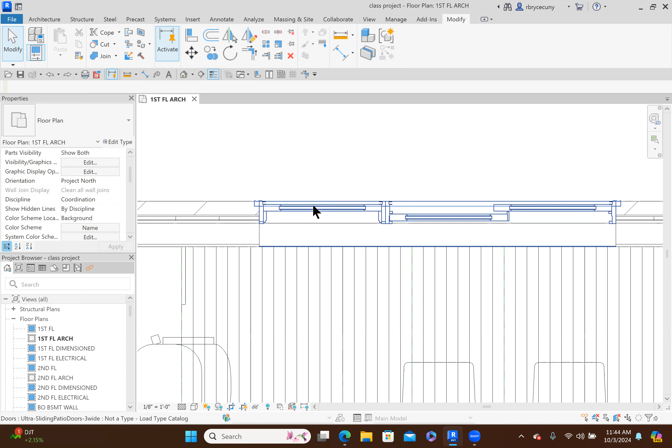So I spend time just looking at the plans and saying, what's working and what isn't, what's right, what's not right. I notice these door walls are more likely connected to the brick, which is just a veneer. There's no structural value to the brick. Basically, it has the ability to support its own weight, and that's about it.

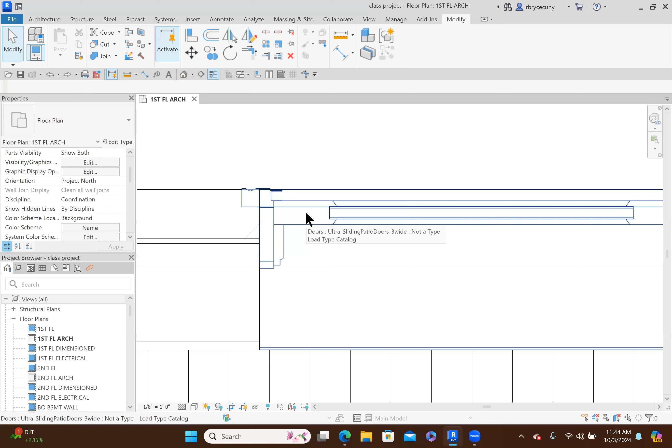So what that means is that this door wall needs to be recessed so that it's fastened to the stud wall. After the walls are put in, the door walls are put in, then the mason comes back and puts in the brick. It's a decorative finish, but it also is a weather-tight finish to keep the elements out of the house, but it's not a structural element.

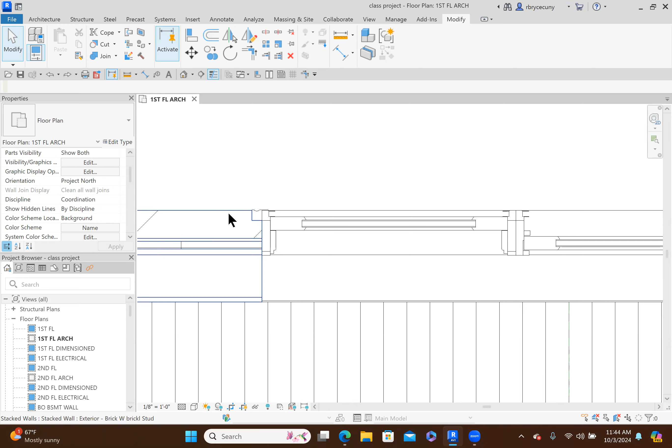So where this door wall is situated in the wall right now, it's as if it were fastened to the brick, which is not true. So let's take a look at the properties of this door wall, and you can see that the inset is set at 0, and the brick is 4 inches thick.

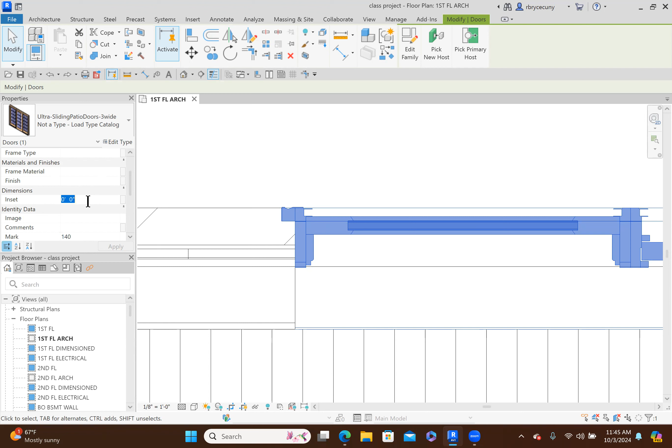So I'm going to change it to 4 inches, and you'll see what happens is that the door wall ends up coming back maybe a little bit too far. This is the brick mold, and that's what covers the transition from the brick to the door wall and the siding, or the stud wall. So that looks like it might be a little bit too much, 4 inches.

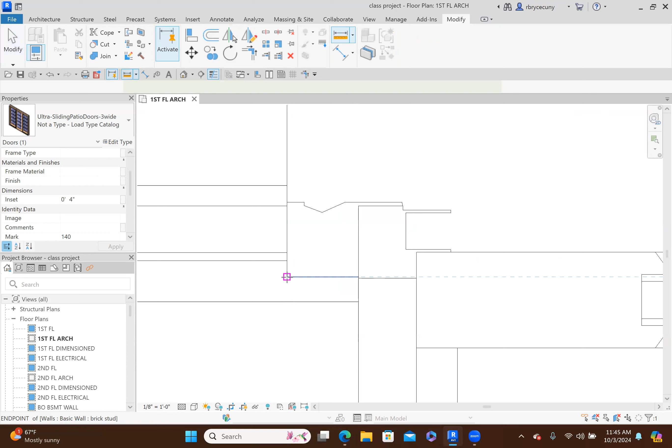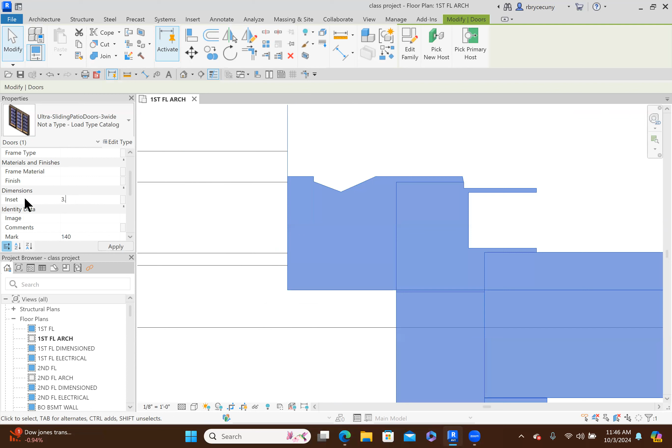Let's just change it to 3.5 inches and see what we have there. So this really should come back to here. I don't really want to do the math though.

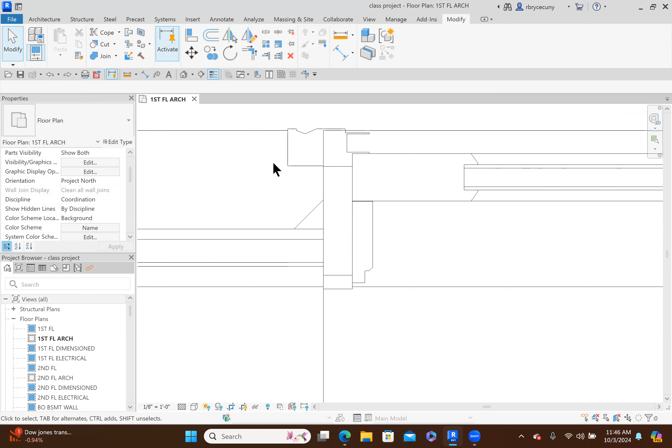1/16 of an inch. Now, so what I'm going to do is go back to the beginning. I'm just going to undo till it gets out there. And I want to move this back so that the back of this brick mold is touching the plywood sheathing.

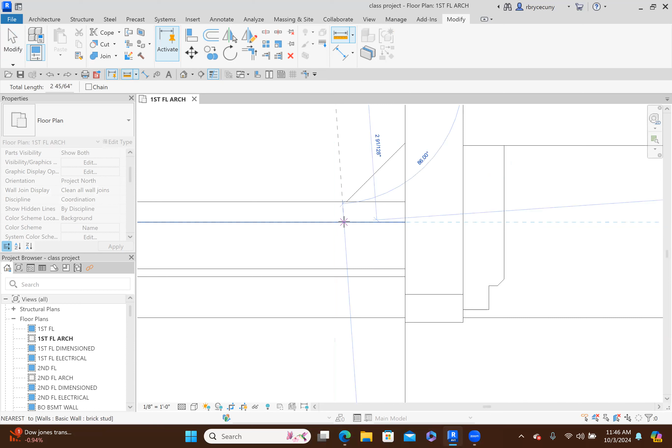So I can just measure that. I'm going to measure from here to the plywood sheathing, and you see it's a weird dimension, so I don't have to do any math. I will just copy that, Control C. That's the distance that I measured.

Then I'll click on the door wall and I'll say, that's the inset. Control V and paste it. And that gets it right where I want it to be. So it hides the edge of the brick, this brick mold, and it covers the wall itself too. So it's a finish, and that looks pretty good.

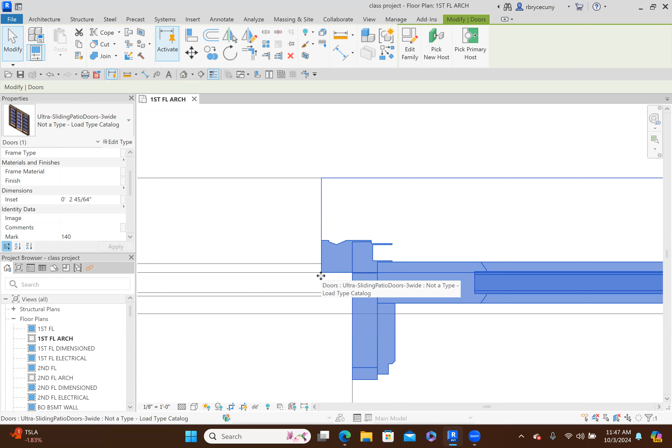Now, what I like about this particular door wall is that it actually cuts out the brick all the way to the face of the brick mold. A lot of windows just cut the wall perfectly straight here. So that's a good thing for whoever made this particular door wall, because that's actually how it's made. The brick and the edge of the wall don't line up. There's a step or an offset there.

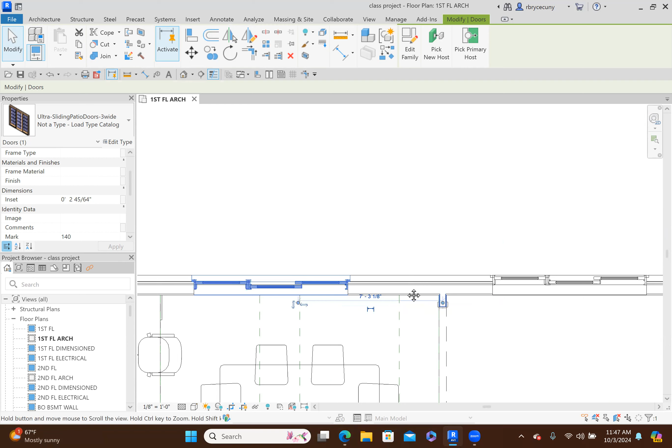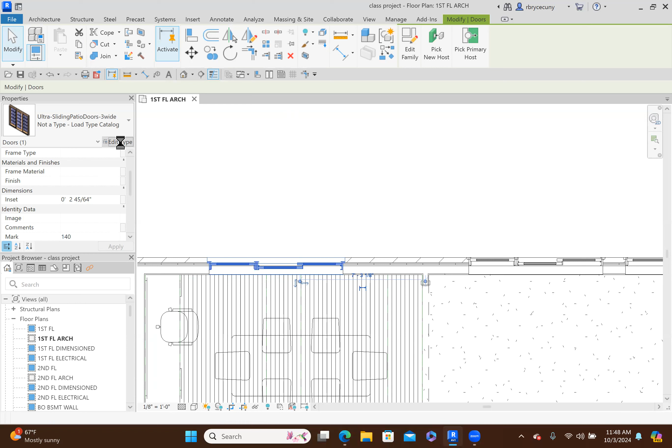So now it didn't change the other door walls, because when this was made, it was made as an instance instead of a... let's see, what's the word... type. So the difference is, if it were a type and I clicked on this, I would have been able to edit the type and tell it that the offset or inset for all of these were that distance we just determined, and it would have changed all of them.

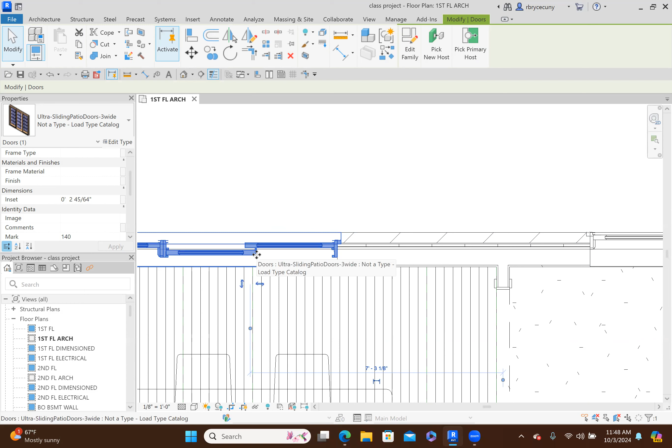But we did it for an instance, and again I prefer that, because sometimes this door wall might be mounted in a brick wall, and sometimes it might be mounted in a stud wall. So that's actually a better way to do it.

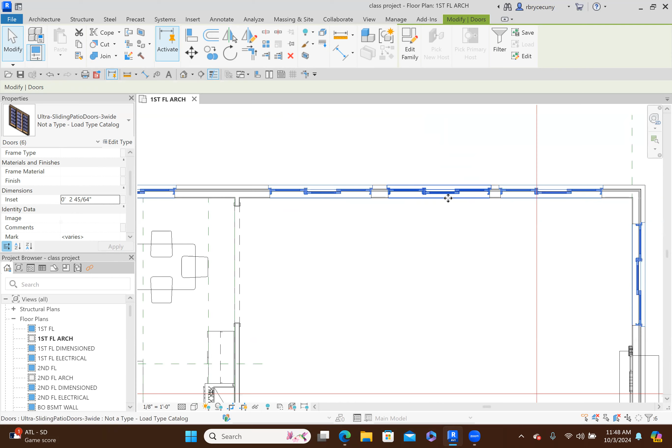So if we click on it, right click and say select all instances visible in view. Then we can change the inset of each one of those globally. And it did change them all, but whoever made this particular family really knows what they're doing.

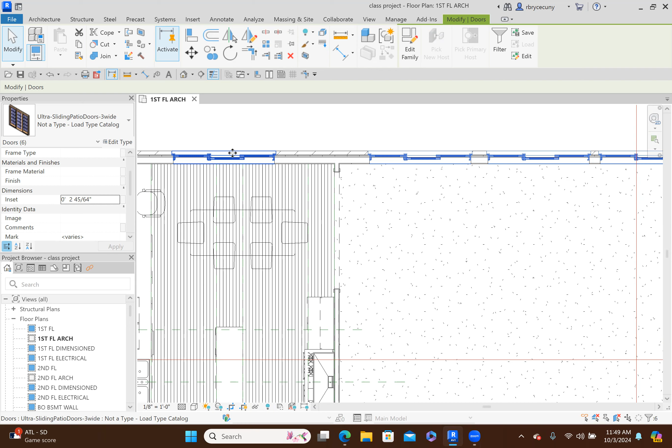That's one of the issues I find with Revit families from manufacturers: the manufacturer hires a programmer to write and create that family, but that programmer is neither an architect who uses the product or family, nor the actual installer who puts that product into a wall. So I like that whoever made these knows what they're doing in terms of how architects use it, but also how the actual construction occurs in the field.

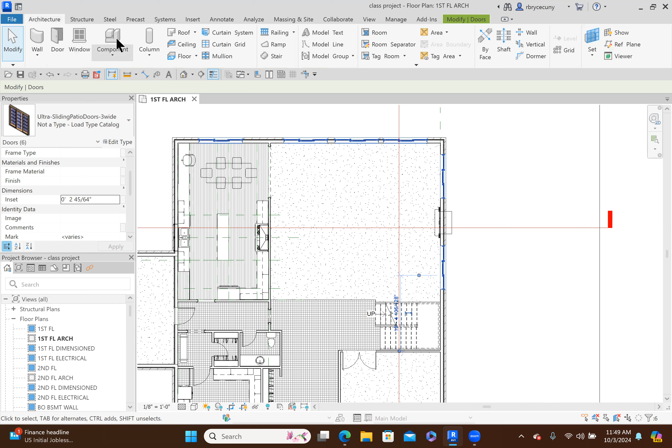So now we want to look at this and say, well, okay, what happens? I went to Revit City and got some more families. I picked a couple dining room chairs, downloaded them and loaded them into the project. And I got some dining room tables and loaded them into the project.

And I looked at them and I said, nah, that's not quite what I want. So let's search for table, let's see what comes up here. So I've got this parametric rectangular table, which was good. And what that means when it's parametric is that I can change the properties. I can make it longer or I can make it wider.

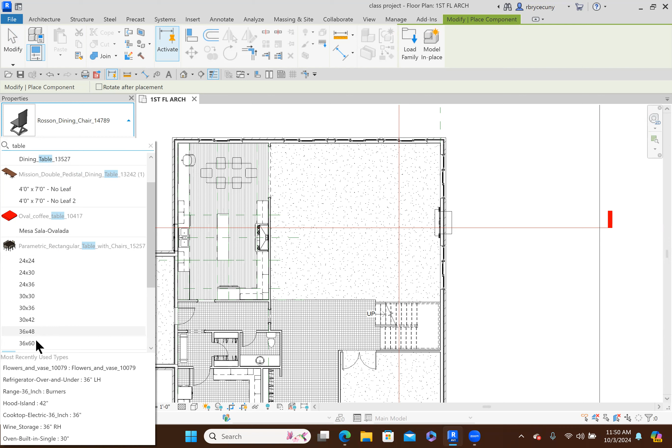So if we pick this one, there's a problem with that. I'm going to put that in and show you the problem - I can change the properties of that. So instead of being 5 foot, let's make it 12 feet and watch what happens. I made it 12 feet, but it didn't add any more chairs.

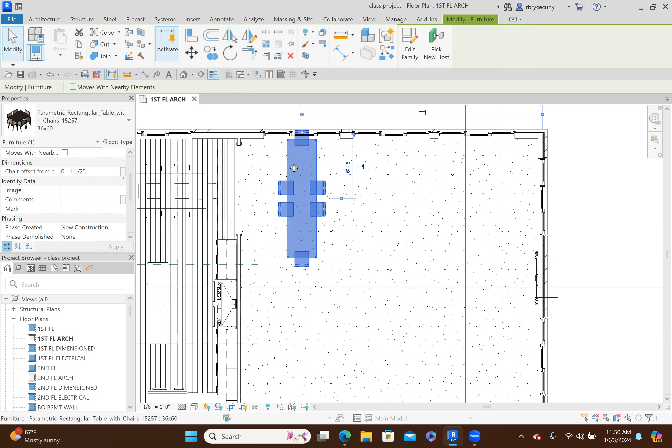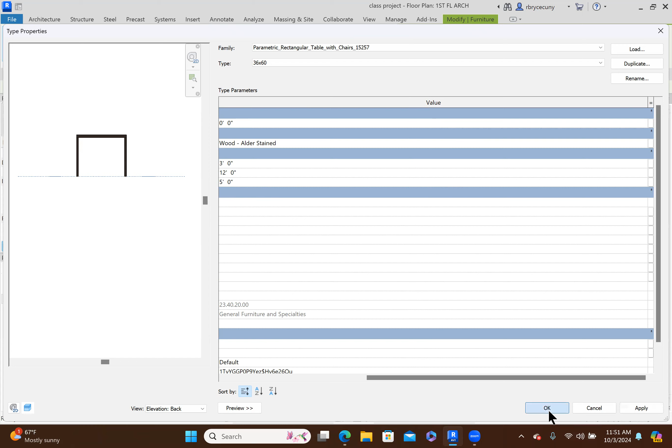So this would have been... the person who made this made the table parametric, but they didn't make the chairs array to expand for the table. So we're not going to use that one.

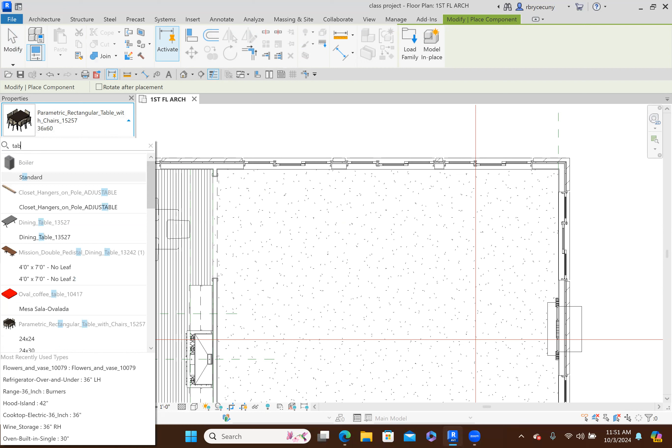Component - well, I picked a couple other tables, because I have a lot of space here and I want a wide table. So let's do that search again, TABLE for our search criteria.

I don't know, let's see, I don't remember which one was better. Yeah, that's good, see, that's a big table. And then we can put our own chairs in. So that table's all right.

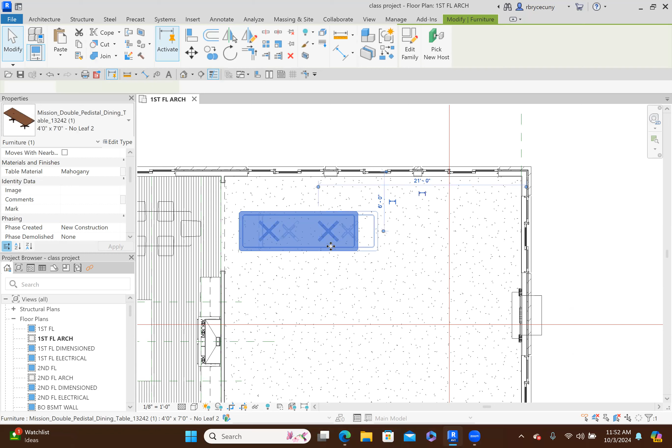And I'm going to put it that way because I decided that it's an odd shaped room, really. I'm going to make a little seating area around here with the big screen TV, and then another seating area around the fireplace. So that's a little bit of a weird layout, but I think it'll work.

So let's put some chairs in. Architecture, component - now we're going to click on that and type chair. Let's see what kind of chairs we have. Certainly don't want an executive chair.

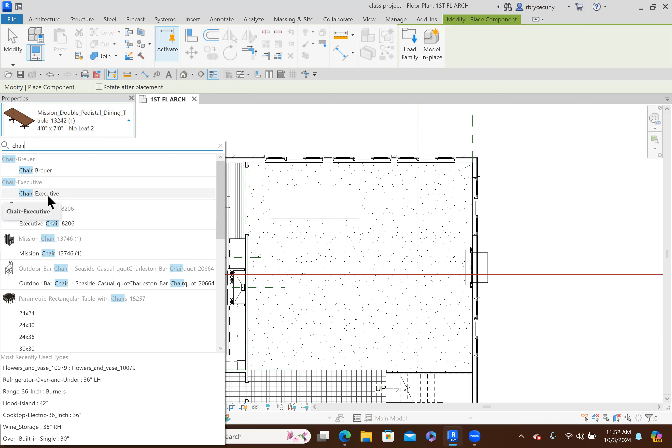That restaurant chair was kind of nice, but I tried it out and I didn't like it enough. But let's see, we'll use these chairs. So I'm going to put one in. I don't know what's the front, what's the back - I think this might be the back, but I don't know for sure.

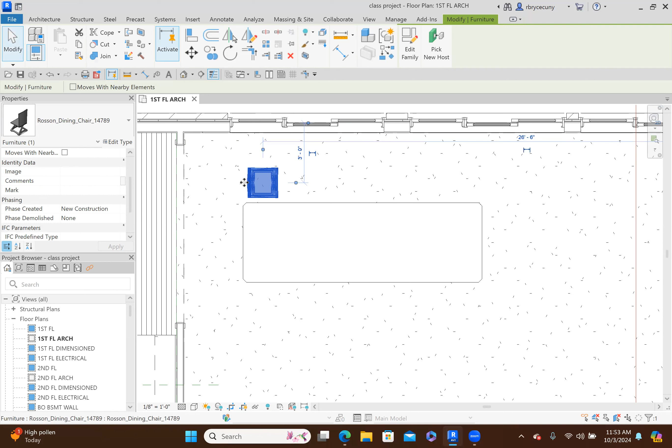So let's look at it in 3D just to see what we have. Yeah, so I need to rotate that chair. So let's click on it and hit the space bar. That's the orientation that we want.

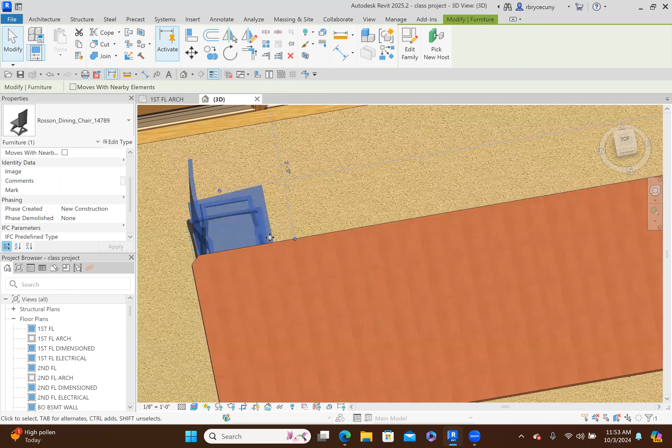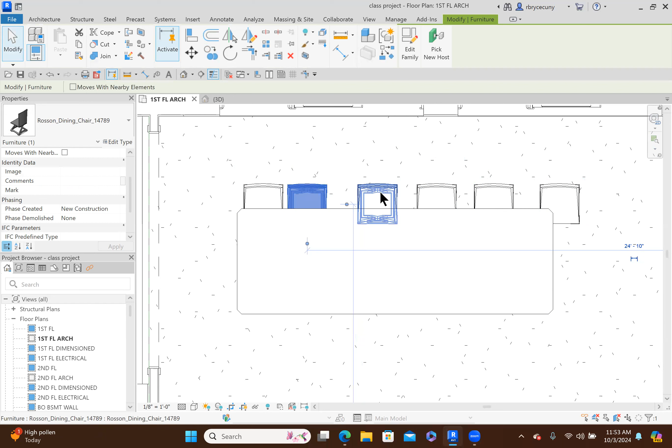Back to the first floor. I'm using the arrow keys on the keyboard, and we'll just copy these down from here to here to there to there to there. Maybe one more, and a little closer. Again, I'm just nudging them down with the arrow keys, trying to make some space for that last chair.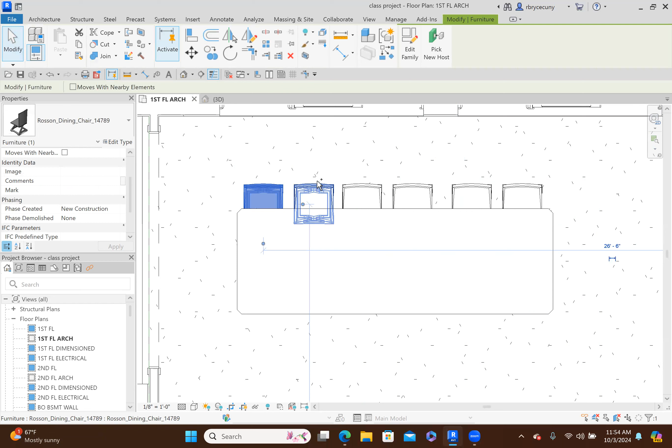Arrow, using the arrow keys. Now I'm going to use the mirror command, so I'll select each one of these and mirror about an axis. It's going to pick that axis and mirror those chairs about it.

So now I have my dining room table and chairs in there. 1, 2, 3, 4, 5, 6. So that seats 12 people. That's a lot. If you're celebrating a holiday and have a lot of people, we could really sit everybody there like that.

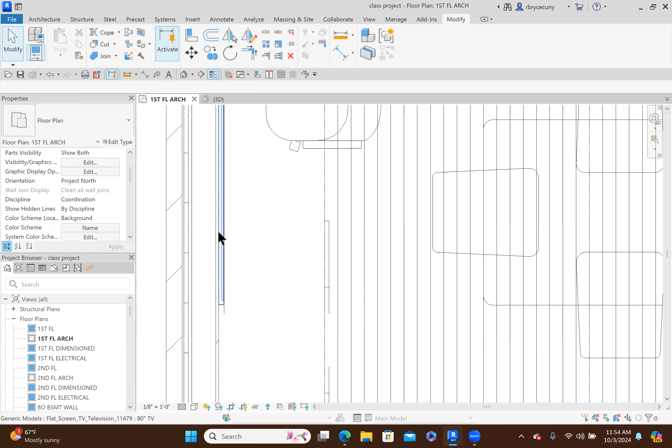Now let's put some, I think we put that TV over there. Let's pick that TV, say create similar, and grab and make it, and put it over here.

Okay, now let's look at the properties of that television. It's 80 inches. Cancel out of that. I want to see what other sizes we have. That's the biggest one that they have.

But if we edit the type, maybe we can make it wider. So let's duplicate it, and we're going to make it a 100-inch TV. So that means that this width would be 100 inches.

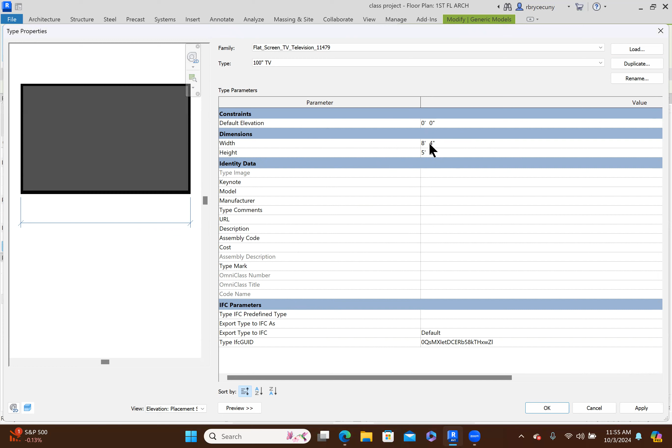And it changed the height of it as well. So there's a relationship between that, so that apparently whoever made this family said there's a relationship between the height and the width. So that's good, all right.

So now I have that big screen on there. It should really be centered on that wall. Let's take this section and we'll drag it over here and flip it and take a look at it. Did I flip it? I didn't flip it.

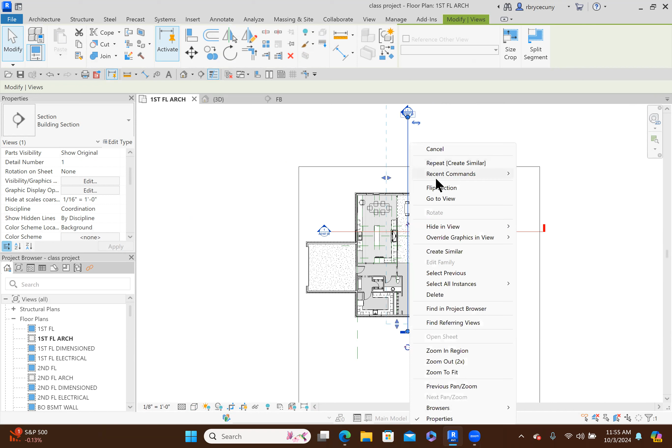Flip the section, then go to the view. Now we can see that TV. Of course it's too low, so let's raise it up so that the top of the TV lines up with the top of the door. And then I guess we could center it on that wall, although that wall extends beyond. Maybe we should center it from here.

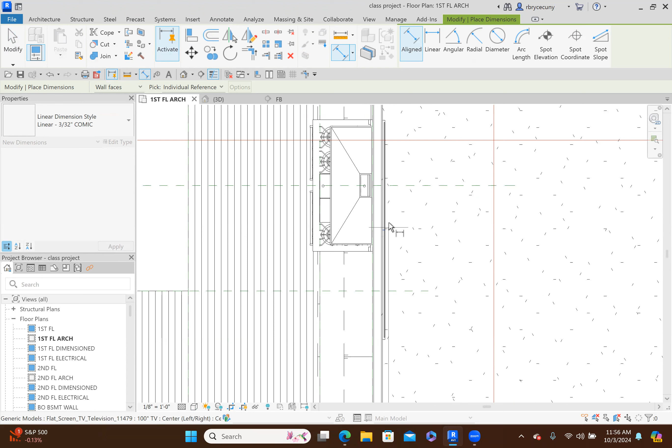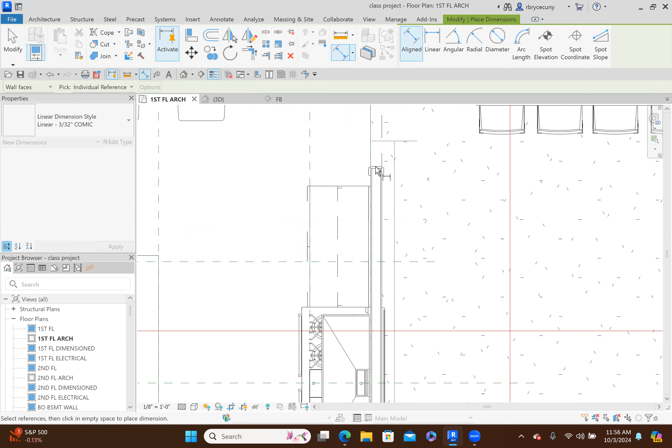So we'll just put a dimension line from here, try to pick the snap to the midpoint of that TV, if it does. Doesn't look like it does. All right, so then what we'll do is we'll put in a reference plane. Let's put one in right here. And then we'll dimension from here to the reference plane, to the edge of the wall.

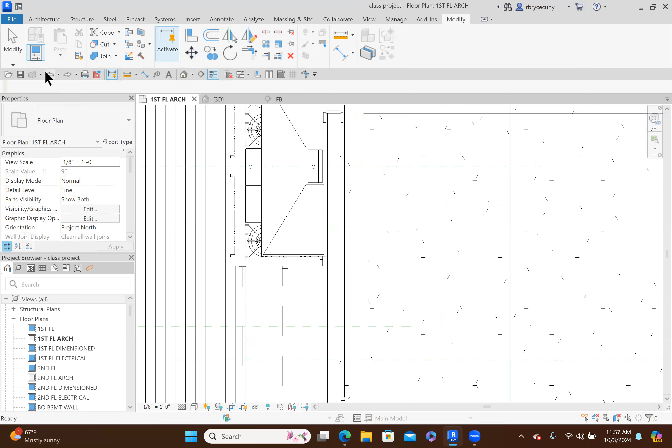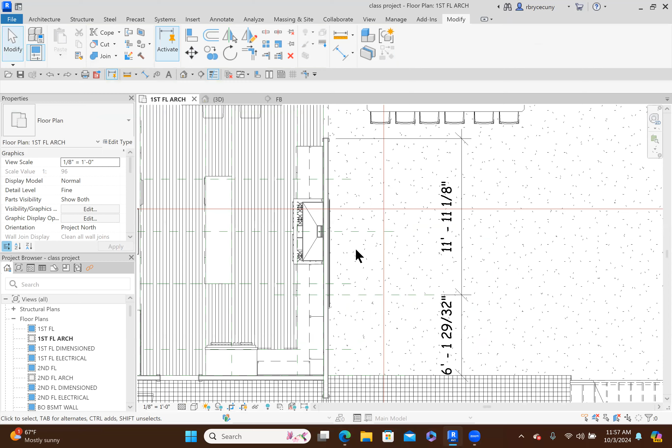Uh-oh, we did something wrong there. I'm going to undo that again. We click on this, we say we want it to be equal. Oh, look what it did. That's what it's doing, that's not good. It's making this distance and this distance equal to this distance. So that's not good. All right, so let's just do it by eyesight then for now.

All right, got the TV in there. Don't need these dimensions anymore. That reference plane didn't work. It's what we wanted to do. I guess we could do it this way.

Reference plane here, and we'll draw another reference plane here. Oops, not at an angle. Another reference plane, let's see if this works for us. So we're going to go from here to here to here, and then say equal. Aha, so that did it.

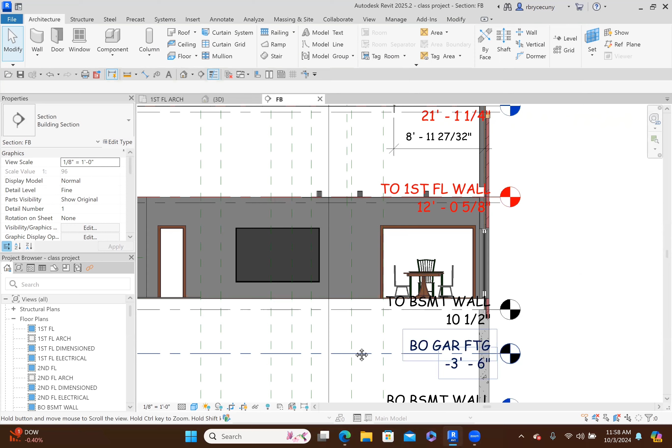Because I was trying to get the reference plane at the midpoint of that area. Okay, and then let's look at the section again. We should be able to see that reference plane, which I think is this one, but I don't know. So back to here, we'll name it. This is the one we're concerned about, TV.

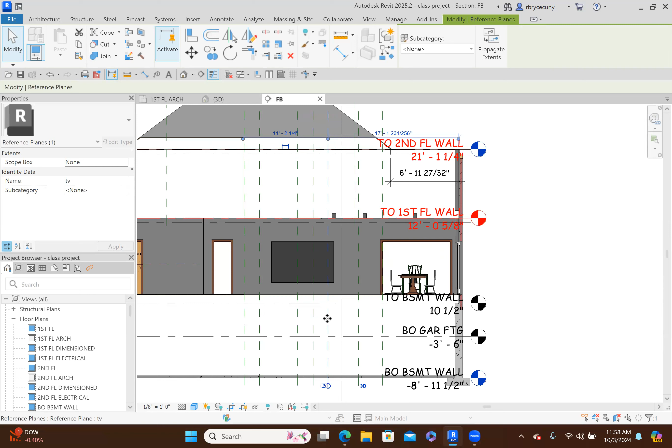Okay, we'll go back to the section, and that wasn't it. That's not it. That's it, that's the reference, TV reference plane. So we'll grab this and move it. We're going to move it from here.

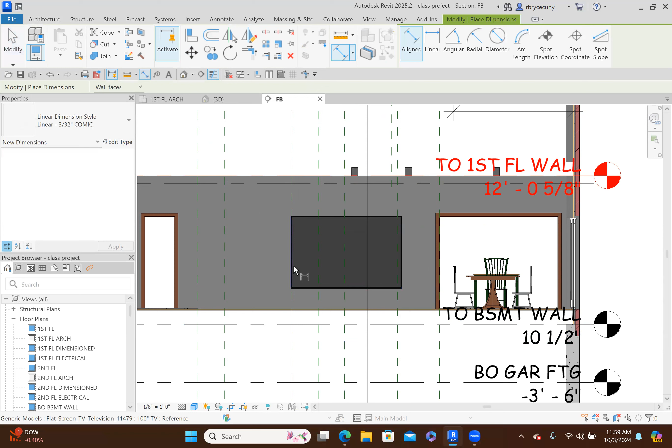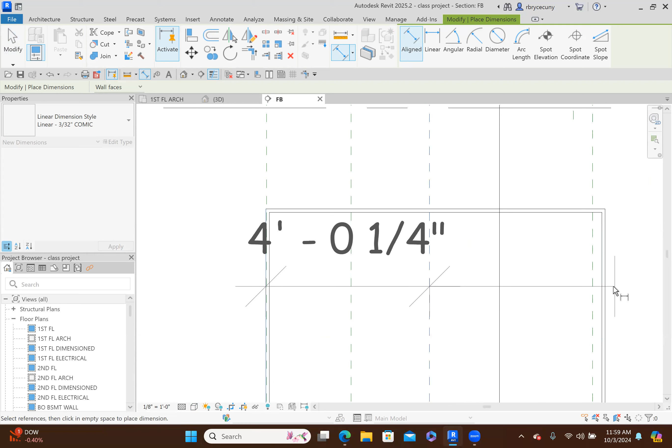It looks like the midpoint. Okay, let's double check, that's the TV reference plane. This distance from here to there should be the same. Oops, put in the third one. Let's change the display, so we're going to go from the edge of here to the edge of here, and it isn't. So let's see if we click equal, what happens now.

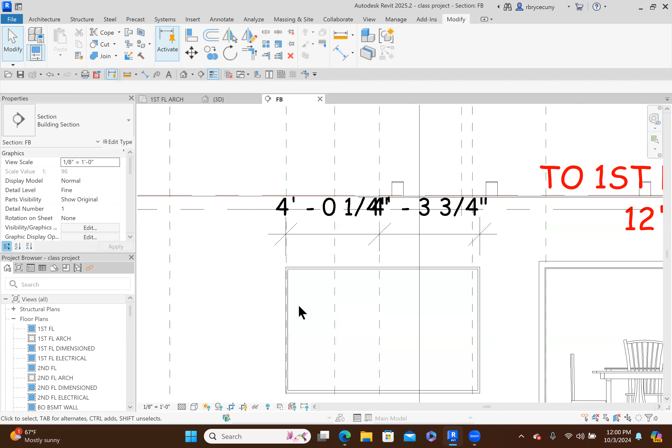It's off by just a little bit. That is the TV, and we wanted to align the midpoint of the TV to there. There we go, okay, so now the television's in a good spot. Maybe we'd raise it up a little bit in real life, I don't know. So now we've got that.

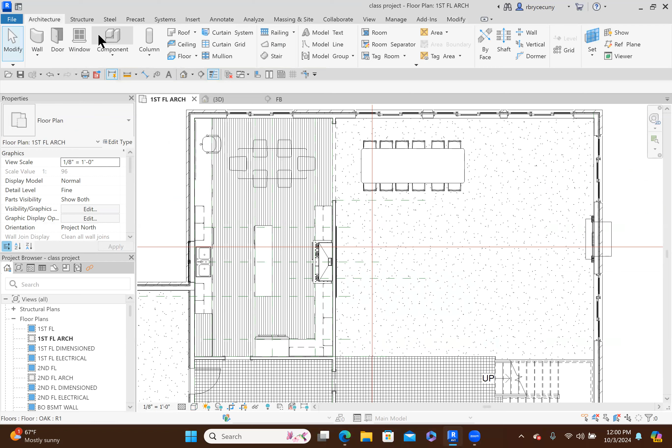Let's put some chairs around there. You have in your component library some sofas. Let's take a look at what we have here. I think it's also downloaded from Revit City, but I think it was made by an Italian architect.

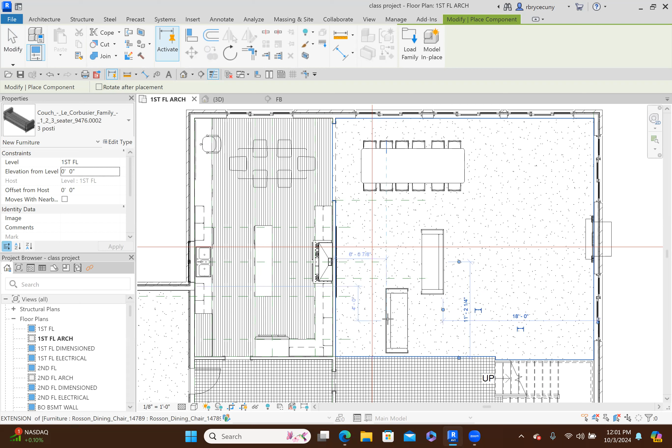Scrolling all the way up here. There we go, so take the big one, hit the space bar, put one here, and we'll put another one here, another one here. So now I'm thinking maybe we need to move that TV down anyway, because...

...sitting area like that. Then we can do the same thing, right click, create similar. Let's do the same kind of a U-shaped sitting area around here.

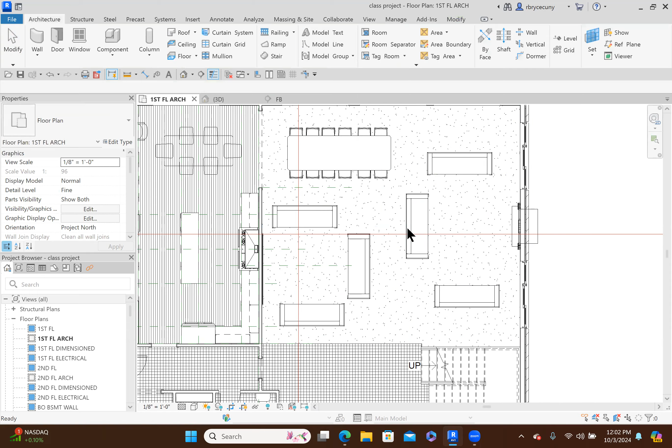And I don't know if we have a coffee table or not, so let's go over to Revit City. We're at Revit City, let's look for coffee tables, see what we have to choose from. All right, I think this is kind of interesting. Let's download that oval coffee table.

Open the file. It's going to tell us that it was made in a different version, so we always have to upgrade the model, and then we'll load it in. And I think, except for the office, we got enough furniture in there.

This is a slightly different arrangement for the floor plan. All right, that's fine, let's load that into the project.

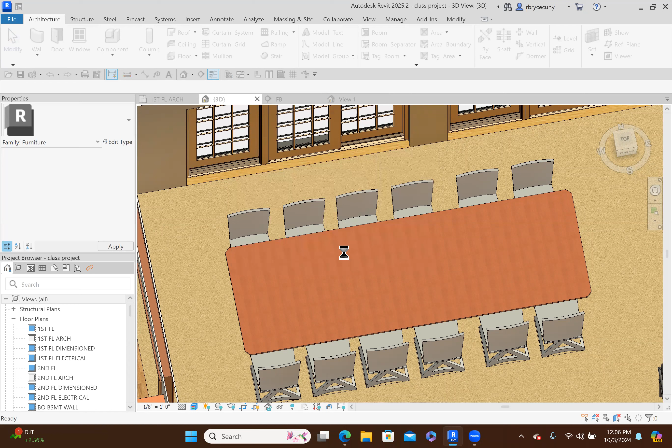Put a couple coffee tables in there. Interesting, it says I already have it in their library, so you would have it, you already have it in your library. I didn't realize that I'd selected that one before.

Let's see, we'll go to the first floor. And sometimes, remember, the family, when you load it into the project, it attaches to the mouse cursor. Sometimes it doesn't - this time it didn't. So we'll go for that coffee table.

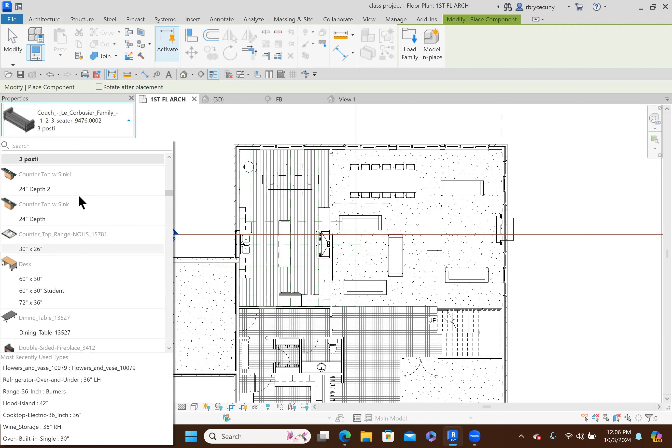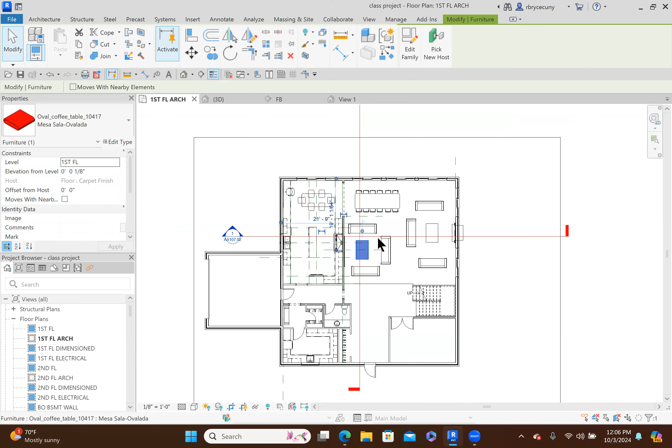Search COFF - yep, there it is. And then we'll put it right there, then we'll put another one right there. Move it over just a bit. So that's enough.

That's enough of a demonstration to see how to put in the furniture, just to make sure that your room is of an adequate size.

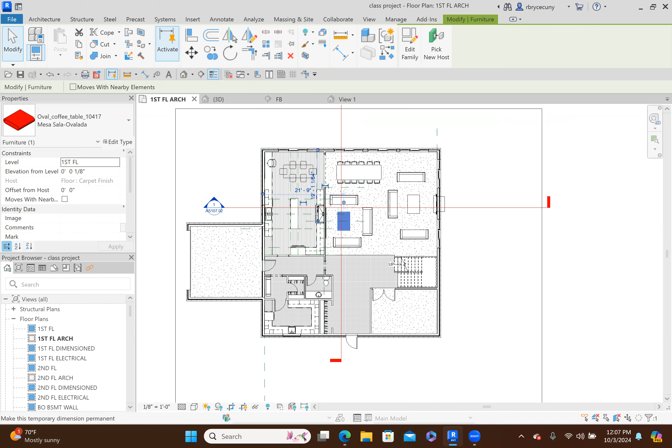So let's take a look at this in a rendering. And that's what it looks like rendered. Now I'm going to take a look at this and say, I really should have set the sun from the other side, because look, it's casting a shadow in these spaces, and it would have been nicer to see this wall and to see this wall.

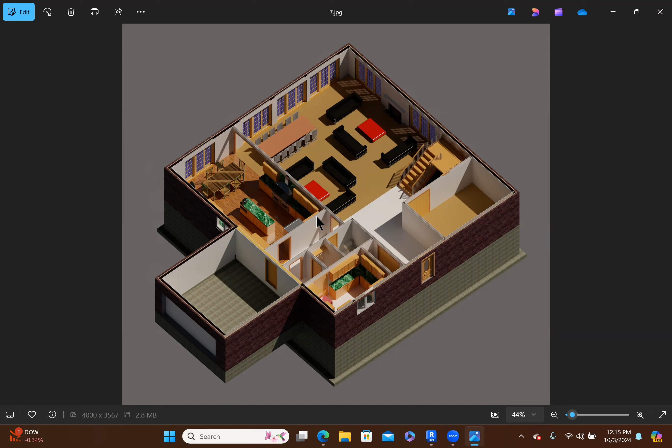So to change that, when you're rendering, you go to view and go to your render button, and we can say, instead of the sun being from the top right, we'll say it's from the top left. And that will mean that the sun is shining down this way.

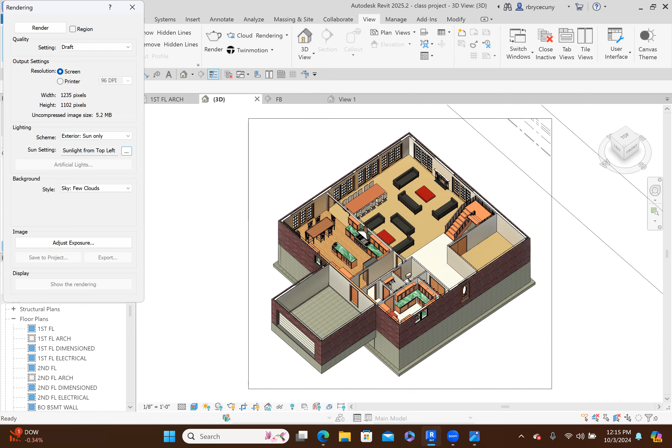And here it is with the sun setting from the upper left. So you see how it shows better, it's not in shadow anymore. And that's kind of what we're looking at. So sometimes it makes sense to pay attention...

...to the angle of the sun when you are actually creating a rendering. So if this wall were important to see, like this wall is and this wall is in this view, then it makes sense to have the sun coming from the top left, because it's going to highlight and not put in shadow for that.

So we covered the inset of the door walls. We talked a little bit about instance versus type. We haven't created any families yet, but when we do, you'll know the difference between instance and type. Instance is going to change each one individually - if you change one of the settings, it'll change it only on that object. And type means that if you change the setting, for example the inset, it would have changed them all.